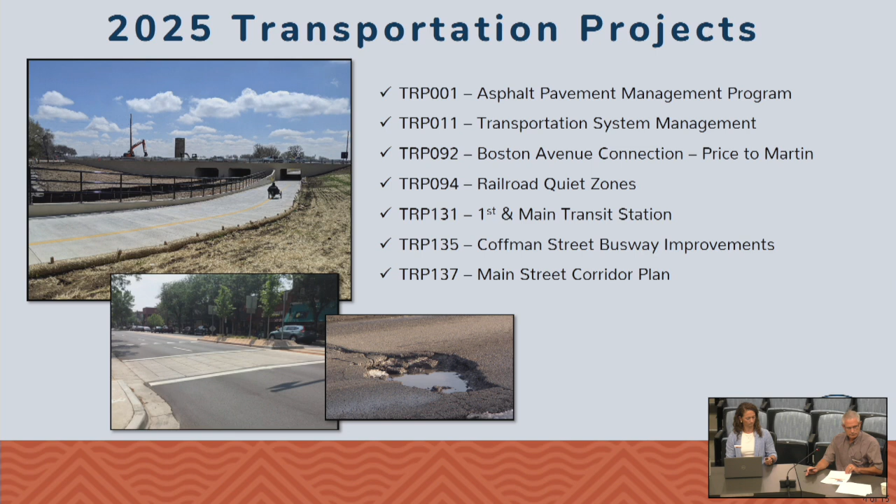At this point, I'm going to turn it over to Aaron for a slide or two.

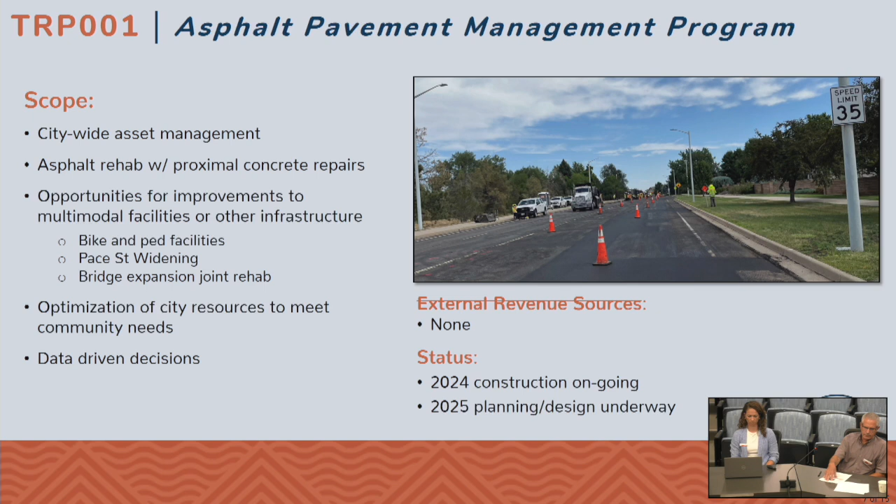Another big goal is making data-driven decisions within this program. We acquire pavement inspection data on a regular basis and use that with pavement management software to help select which projects are included on a yearly basis. This program really is the cornerstone of maintenance and rehabilitation efforts for Longmont, which is a big effort considering Longmont has over 357 centerline miles of roadway.

Our next project is our Transportation System Management Program, or TSM. Again, this is a yearly program. Projects can range from safety improvements to neighborhood traffic mitigation type projects. Currently, this is where our Vision Zero program is housed, and you'll be hearing more about that program later tonight.

This is a program where we've been able to leverage our existing street fund funding. We've been able to acquire several state and federal grants totaling approximately $4.5 million for these TSM projects. In 2025, we're going to see a focus on construction.

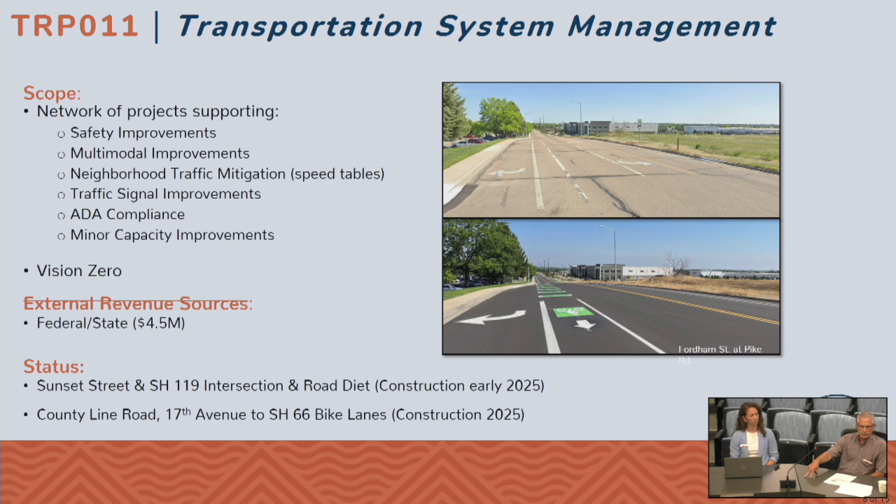Two projects scheduled to go to construction are our Sunset Street and State Highway 119 intersection improvement project, and our County Line Road shoulder improvement project. This shoulder improvement project will widen County Line Road from 17th Avenue north to Colorado 66. The widening will accommodate on-street bike lanes, but in addition to the widening and bike lanes, this project will include a variety of other safety, drainage, and asset management type improvements.

TRP 92, our Boston Avenue Connection Project. It's a project located near the intersection of Boston Avenue and South Pratt Parkway. The scope includes several components, the key piece being a new at-grade crossing of the Burlington Northern Santa Fe Railroad. The project also includes new pedestrian and bike connections, and will help support BRT service within Longmont.

The good news is, earlier this year, spring of this year, our PUC application, it took quite some time, but was finally approved by the Colorado PUC. This approval will permit this project to move forward to construction.

Right now, the design is virtually complete. We're working on two phases: relocating existing utility conflicts, and acquiring needed right-of-way and easements for the project. This is another project we expect to go to construction in 2025.

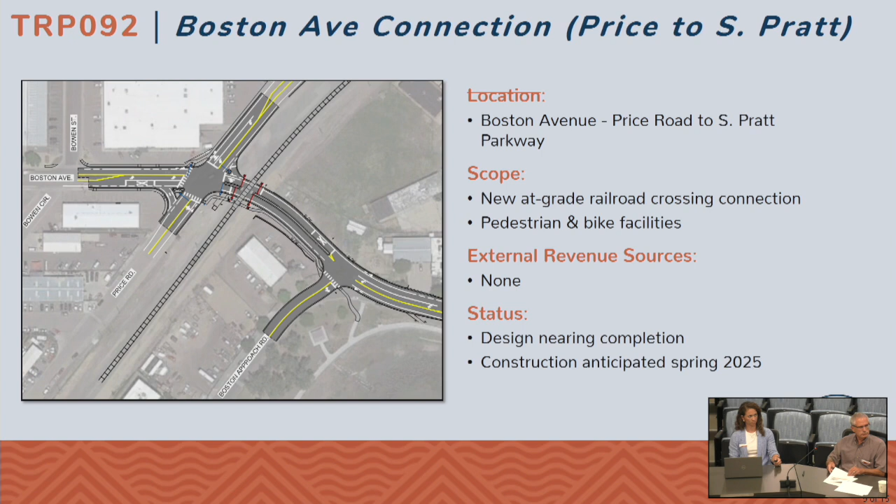Next project is our Railroad Quiet Zone project. This project will be ongoing for the next couple of years. It has a couple different primary components, and certain safety benefits, but it's really a quality of life improvement. The primary goal is to address community identified needs and implement a city council priority by greatly reducing train horn noise throughout Longmont.

This will be accomplished by the design and construction of certain supplemental safety measures, such as the installation of railroad gates at all 4 quadrants of certain rail street intersections.

It sounds like a fairly straightforward project, but the coordination behind installing those improvements is rather cumbersome. We need to coordinate with the PUC, the FRA (Federal Railroad Administration), the railroad - big item, Burlington Northern Santa Fe, I don't want to say much beyond that - and CDOT. So a lot of coordination and effort is going into the approvals of the design for this project. And admittedly, we did have a setback this year.

This project went to bid during late spring of this year. When we opened bids, we only had one bid, and it was significantly over our budget. Since that time, we've been refining the scope of work, and we're at a point now where we think we'll be able to go back out, test the waters, and rebid the project in about a month to a month and a half.

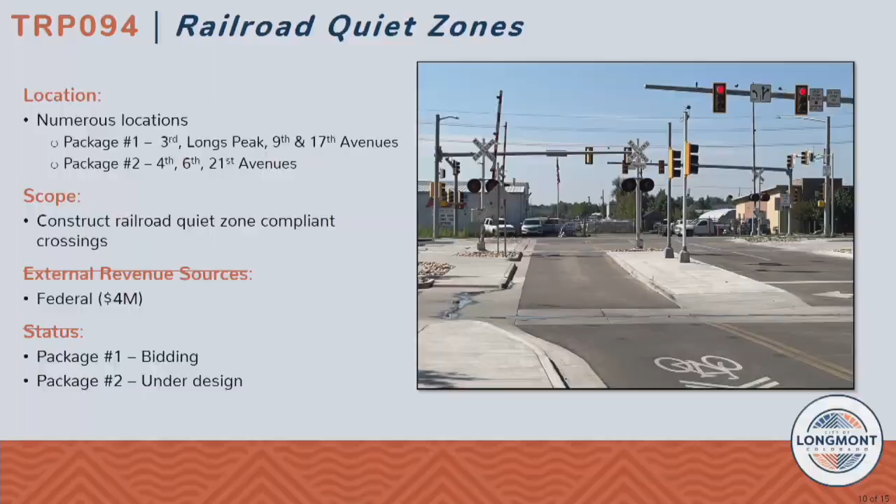Hope is extremely high. What we've done is add some additional design information to the plans. One of the big items was the type of shoring needed for certain utility work next to a railroad. As you can imagine, with trains going by, and you're digging a hole, you really have to support that hole in a very serious way. In our initial attempt, we left some of that up to the design of a contractor who would be selected for the project. This time around, we're designing that shoring ourselves, and it will be included in the bid package.

But I think with that additional design information, we're bidding at a more favorable time of the year too. So we're very hopeful that we'll have more than one bidder, and more than anything that we're going to have competitive bids.

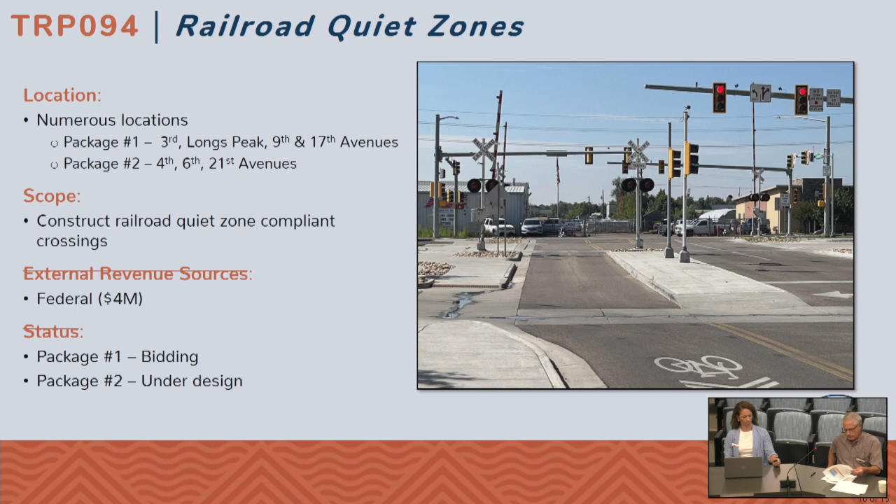Next project is TRP 131, our first and main transit station project. This is a project where we've entered into a partnership with RTD. RTD is coming to the table with about $16.4 million. Again, this is another project that will help support BRT within Longmont.

Currently, we're designing improvements to a new segment of Coffman Street, from 1st Avenue south to Boston Avenue. The design for those improvements is about 30% complete, and in addition to roadway improvements, there will be new pedestrian and bike improvements, including a 2-way cycle track along the west side of Coffman Street. This project is scheduled to go to construction in 2026.

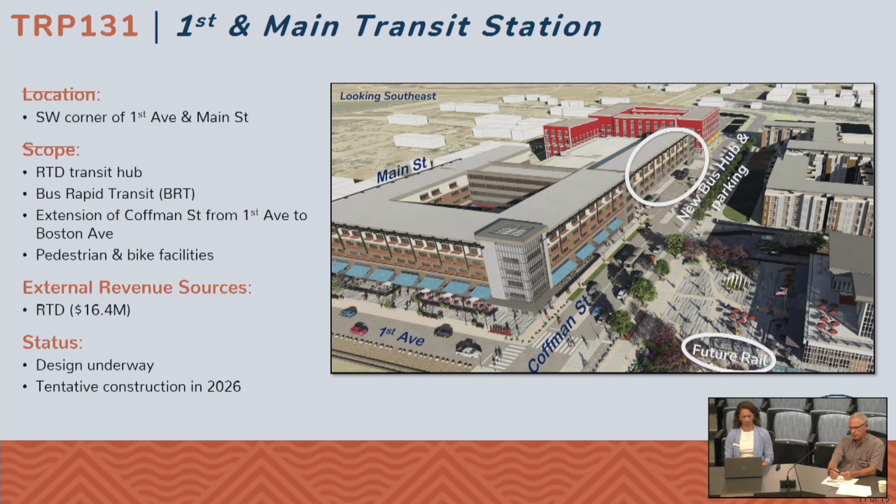The next project we have on our list is TRP 135. It's identified as Coffman Street Busway, also known as the Coffman Street Mobility Improvement Project. This is a continuation of what's already under construction from 2nd to 9th Avenue. The funding being requested for years 25 and 26 is for the design of 1st to 2nd Avenue, as well as some contingency for the construction of 2nd to 9th.

This portion of the project carries on the priorities of the other piece already underway and extends the multimodal improvements and pedestrian and bike safety amendments already made on Coffman. It's also part of the asset management program, since the pavement on Coffman is showing signs of distress, so this will address that and take over improvement of that whole corridor.

This is also one of the connecting pieces between TRP 131, which Tom just spoke about, helping tie in and fill some of those missing links the city is working to fill. The design is a bit over 30% complete so far, so funding for next year will continue that design, aiming to target construction beginning in early 2026.

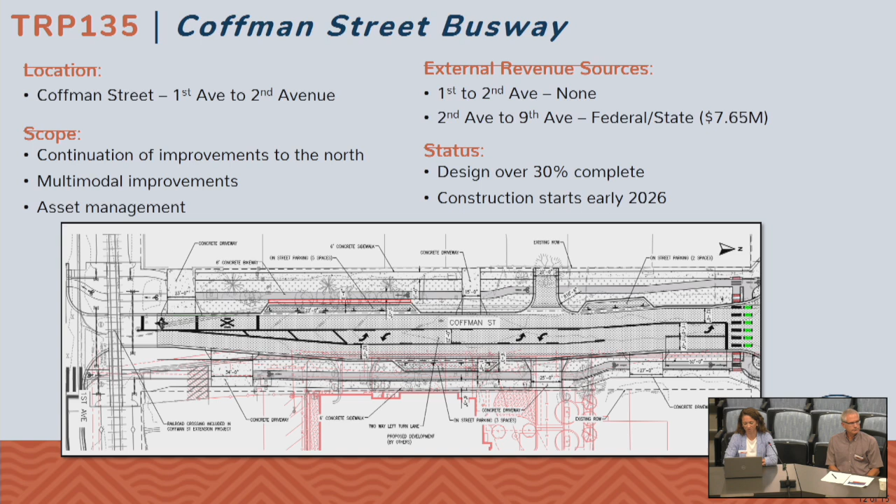We've been the recipient of a DRCOG fund to first do a study to gather information and have conversations with residents in the area, to better understand how they use the intersection, where they're going, what they're hoping to see, and really find ways to make sure that portion of the community is heard. Out of that study phase, we'll proceed with the preferred alternative that will carry through in design, which we expect to start in early 2025.

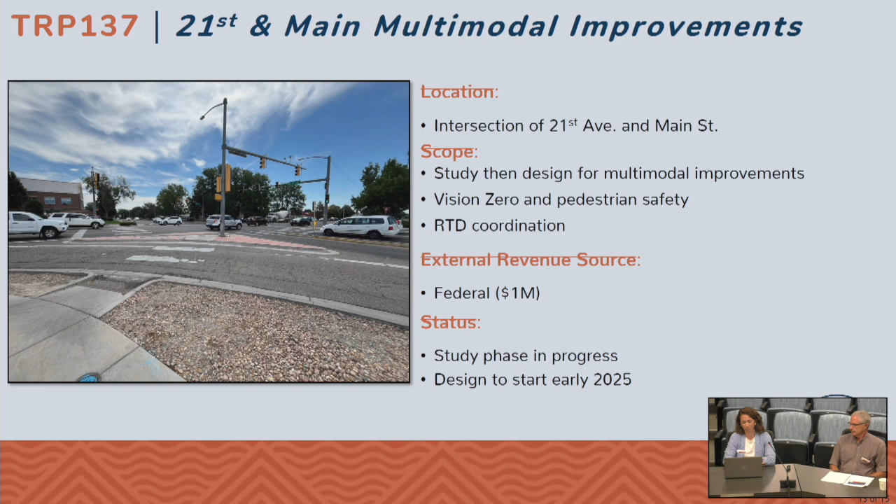Depending on what comes out as the preferred alternative through that process, we will then seek funding at a later time for construction as appropriate for the scope of the project. At this time, that concludes the highlight of the projects we wanted to bring to your attention for 2025, and we'd like to open up for any questions you may have.

Thank you for all this information. I'm very excited about the 21st and Main multimodal improvements—that'll make my bike commute all the better. Thank you for that.

I'm curious to know more about the First and Main project. I visualize it being kind of like the Boulder Junction facility, where there'd be an indoor place for passengers waiting for the bus or train. Is that correct? Is there going to be additional parking, or is this still something in the works of figuring out?

Those are all great questions. I'm going to turn that one over to Phil—he's extremely well versed on virtually every question you asked. Well, thank you, Tom.

Board Member Bennett, I guess the comparison I would make for the First and Main station we're planning for Longmont is more like downtown Boulder. The buses will all be at grade—they'll come into a parking garage where they will stop and hub, basically, and you'll be able to do your transfers all at that street level, underneath the parking levels, with different aspects that'll be multi-use.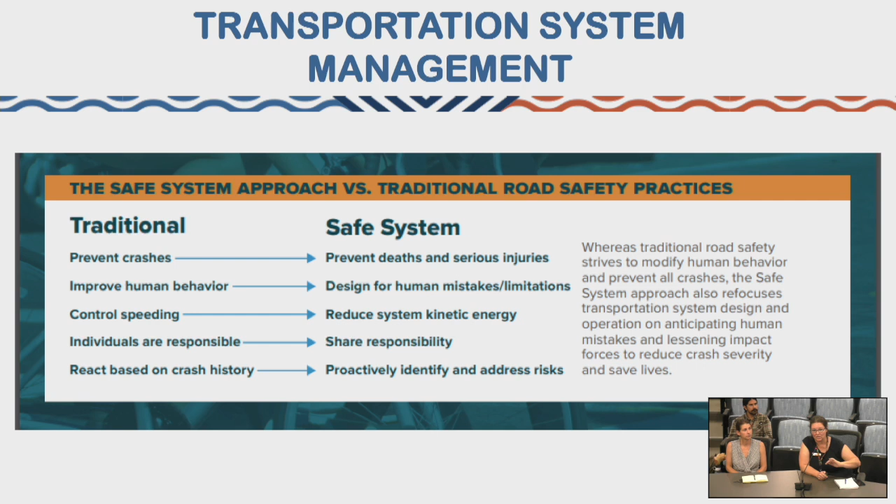This is probably not new to some of you, but just in case, as you were mentioning, kind of flipping the pyramid, putting vulnerable road users on top, sort of having cars not be as centered in the transportation system, but rather pedestrians, bicyclists and vulnerable road users. This just shows the difference between what might have been a traditional transportation management system, but the city is definitely already on the path and has been and will continue to move towards what we're calling the safe system approach to traffic management.

We have just recently, in the last few weeks, internally come up with how we're going to organize our internal structure to talk about all of these pieces through our Center of Excellence. There's a number of Centers of Excellence within Longmont that you may have heard about. One of them is actually a camera Center of Excellence. So the camera discussion is already in progress, and we're joining up with that.

We will be bringing members of most departments, most teams, whenever it makes sense, into the envision work groups on each of these bucket areas internally, and we'll mimic that with the public as well through the task force. Now that we have wonderful Dylan on board, we are going to be putting together our calendars and getting it planned for when we can launch our first task force and invite members into that. So I expect within the next month or so, the first communication is going to go out about getting interested members ongoing and starting that task force work.

Since we started, we've been collecting names, and we have probably a list of 30 to 40 community members who already want to be a part of that task force. So that's great — I encourage you to become part of the task force if you would like to. We can make sure you have the link to sign up for our interest form if you'd like to be, because that's what's developing our email list. We have been growing our relationships and meeting people and talking with people just to spread the word about the upcoming task force with all of the different vulnerable road user groups that we can identify. Dylan and myself are going to continue that work.

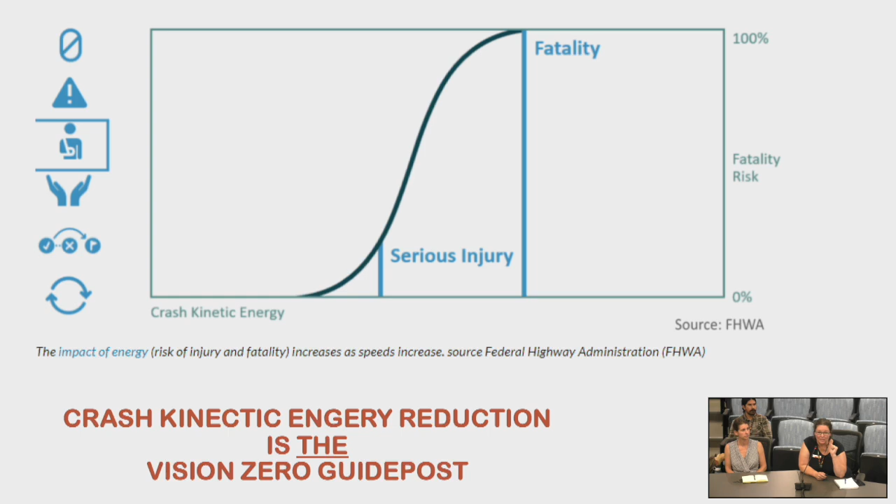Phil mentioned earlier one of the key points, and I think this is a guidepost that most of you will resonate with — please let us know if you don't — but the only way we're going to get to zero is if we reduce the severity of crashes. If we reduce the severity of crashes, we will reduce the severity of injury. Kind of a logical theory behind that.

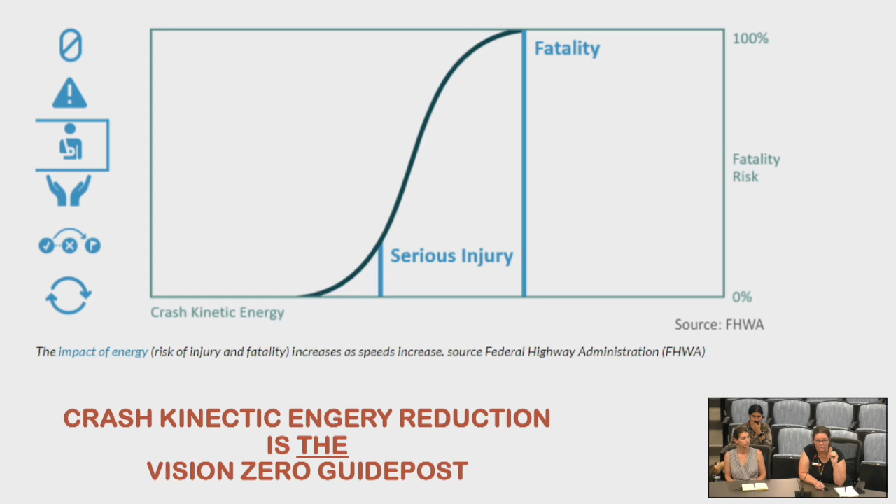So when we're looking at projects, and all of the projects that Tom and Aaron talked about that are already in the CIP list and maybe will be in the CIP list moving forward, one of the things Vision Zero is going to add to the already prioritization discussions and matrices that are already there is how we're reducing kinetic energy in any of the proposed improvements we're talking about.

And then where are we now with our fatal and serious injury rates? We'll propose a set of packaged deals, so there needs to be redundancy in safety countermeasures—not just one, but multiple applied, probably at a lot of our high-risk segments or intersections.

We'll also be looking at the data post-intervention to see if fatal and serious injury rates are going down. So speaking to being data-driven, we'll have a system in place for how we look at the data before the intervention and after. I'm sure that's already happening on some level, but we'll try to operationalize it with the Vision Zero lens, looking at what vulnerable road users were impacted before versus after intervention—not just whether total crashes or FSI went down, but really who's involved.

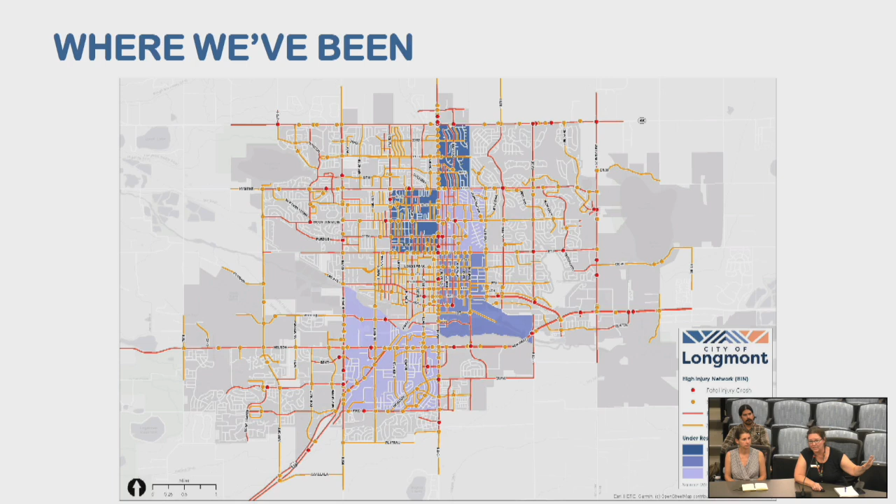We'll have project-based approaches as well as system-wide approaches when we start identifying possible projects. We'll be able to say we're serving our under-resourced communities, which is going to open up access to more money through grants.

And when we get to the completed version of a Vision Zero action plan, we will bring it to you, or a draft version, to review it. We'll go through the same process as the TMP. We'll bring it to council for first review and second review, and eventually hopefully have it adopted. But the task force is going to help us work through the rest of that process.

Just so you know, we're following data-driven solutions. There are 28 already proven safety countermeasures. The feds are putting out more. They're testing all of these new approaches that are prioritizing peds and bikes. They are pushing them out as fast as they can to all the municipalities working on Vision Zero and or safety or complete streets. So we are going to be able to absorb all of that information and apply it to possibly our updated policies, our updated standards, all of the work that we'll go through over the next year or two to get the City of Longmont's Vision Zero sort of baked into all of the guiding documents that we need to do.

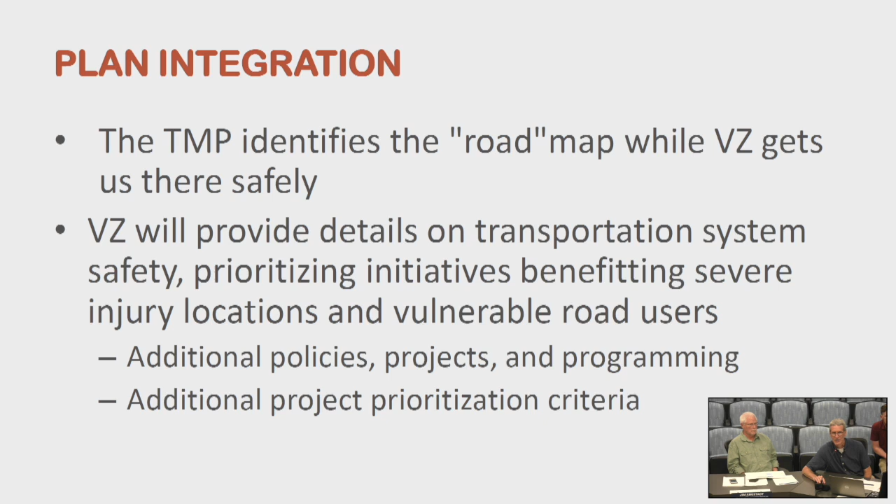So with that, we'd open up to any questions that you might have, knowing that it's about 8 o'clock.

Thank you. I don't really have any questions, but I'm very happy the action plan has started, because before we adopted, and I got all that information from the feds when we went to DC, that action plan is so crucial in order to get that funding, and it will be much smoother with the action plan. So it makes me happy to know that you all are so far in advance right now with the action plan, and you already have your task force, you're building your task force of people within the community. And I see that the plan is growing as well. So I just want to say thank you so much for getting that going and having that community input, getting that task force already, getting them ready, because they emphasize that in DC over and over again. You have to have a solid action plan. So it makes me happy to see that you all have that, because I think the funding will just roll in once it's completed. Thank you.

Yeah, thank you for saying that. Essentially, if you don't have a version of a transportation safety plan, you will quickly become ineligible for funding. Our Vision Zero action plan will act as our transportation safety plan. So to your point, we will be set up and ready to apply for additional funding.

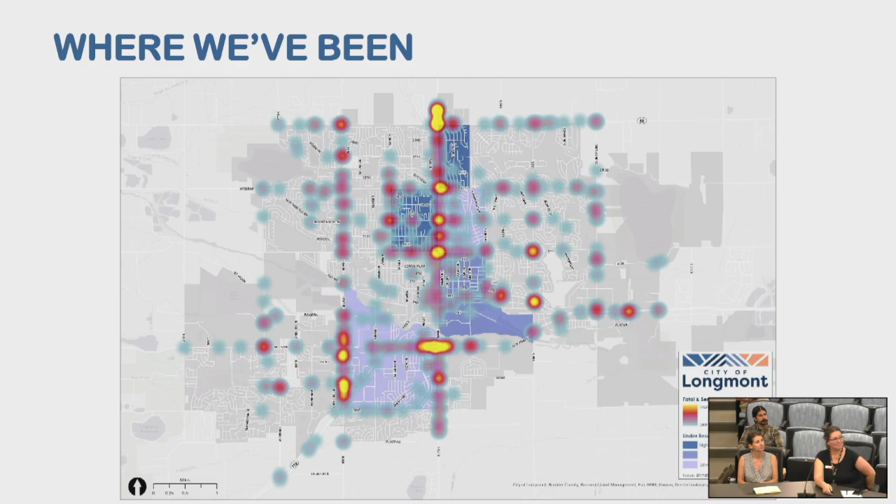Yes. And then for Hover, if you go back to the bicycle map. Sorry to make you flip back and forth. So there's a lot of grocery stores: Target, King Soopers, Whole Foods, and a lot of restaurants there as well, and it's not inclusive for anything other than vehicles. So it would be nice to have different modes of transportation available for that corridor, since there's so many grocery stores and restaurants that we're driving a lot of traffic to. Right now it's really focused heavily on vehicle traffic.

I will add to that, agree with everything you said. We're pulling together where all of our food access points are in the city of Longmont, and we're working with a food security network who has already done a lot of the legwork on mapping that within Longmont, and they're sharing it with us. They've done some individual case studies and test routes with vulnerable road users within Longmont trying to access food, and have a set of draft recommendations for us, which is wonderful. We are going to be incorporating those into the TMP as well as Vision Zero, staying on their work group and working with that local community already to try to make access and multimodal options to these key destinations better in the future. So you're on the right track, and I think we're going to be addressing all of it.

Awesome, I would love to see that data once it's available. Thank you. You bet.

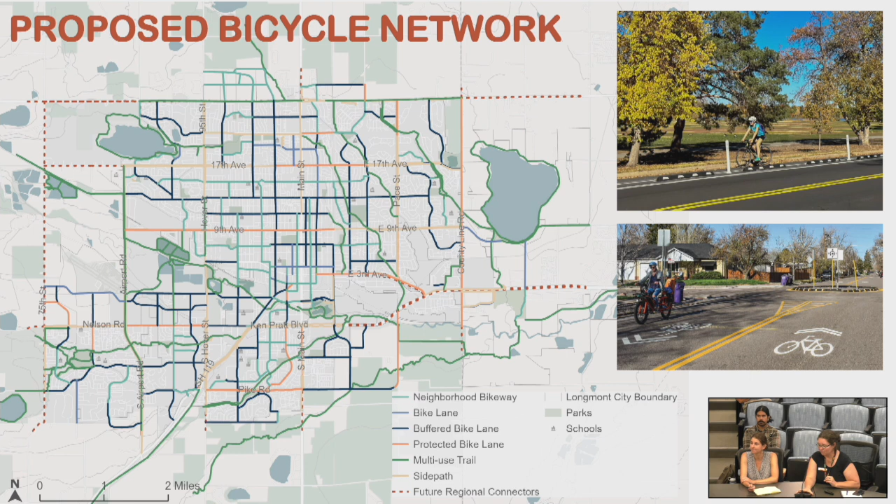Yeah, thank you for your time. And part of what I'm wondering is, I love the collaboration and I hope you get the funding for the $1.2 million from the feds. Is there any collaboration that you're doing with other local municipalities, such as Boulder, Brighton, other bustling regions?

Yes, great question. So actually, myself and the Vision Zero coordinator at Boulder County run a Vision Zero community partnership meeting that brings key stakeholders interested in Vision Zero together on a monthly basis. They also wrote a letter of support for our grant application, and we support their Vision Zero work. We're doing it also with DRCOG, Weld County, all of the surrounding counties and municipalities. Everyone is really working on their version of a transportation safety plan right now, whether they call it a Vision Zero plan or not. Most will, but some won't. Everybody's working on their plan, and we're all working together, not only neighbor to neighbor, but at the regional level, as well as with CDOT, who is also updating their state plan to reflect all of the safety prioritization. So from the feds to the states to regional to local levels, we're all getting on the same page, working together and staying in contact about who's doing what. Once we have these plans written, it's going to make it so much easier to collaborate on actual funding projects together as well. That's one reason why we're all trying to get our action plans done quickly, because it will make project collaboration that much easier in the future.